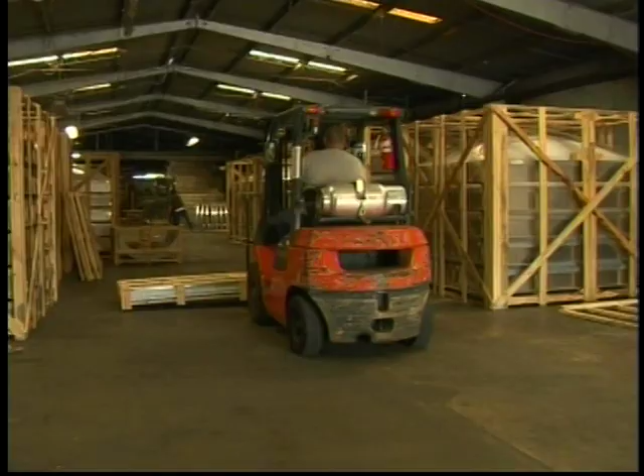OSHA estimates that tens of thousands of employees are injured or killed due to forklift accidents. To reduce the number of powered industrial truck accidents, OSHA revised and updated its regulation 29 CFR 1910.178. OSHA defines powered industrial trucks as any specialized industrial truck powered by electric motors or internal combustion engines.

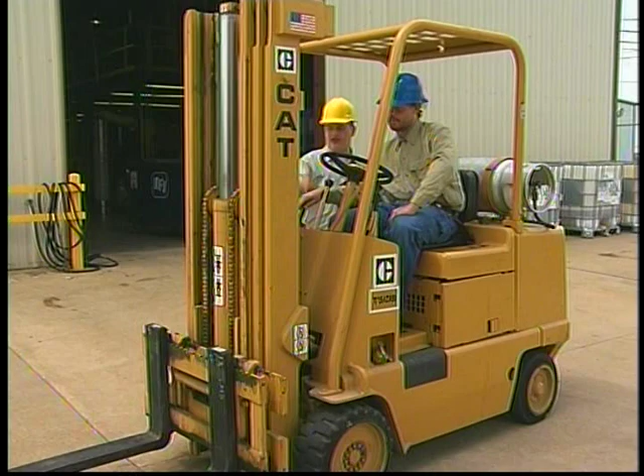This revised OSHA regulation requires initial forklift operator training before any employee can be allowed to operate such equipment. In addition, an employee must go through retraining in case of involvement in an accident or a near miss, if the operator is observed driving in an unsafe manner, the operating conditions or the equipment changes, and every 3 years. In addition to your classroom training on powered industrial trucks, hands-on driving training and a driving evaluation should follow.

The OSHA regulations are to be made available to all employees. Contact your training instructor or your supervisor to review copies of them.

There are many different types and styles of forklift. It is important that you understand the trucks your employer utilizes. Familiarize yourself with and reference the operator's manual that comes with the truck you will be using. Powered industrial trucks are divided into 7 classes based on their basic functions and characteristics.

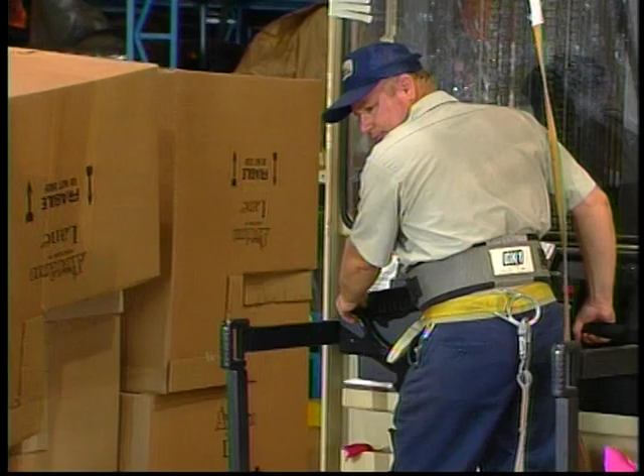Class 1, electric counterbalanced trucks. It has no exhaust and is often used indoors. Class 2, narrow aisle lift trucks and order pickers. If the operator is raised, they must use fall protection. Class 3, electric-powered hand trucks or pallet jacks. This only includes powered pallet jacks, including both the walk-behind jack and the ridden jack.

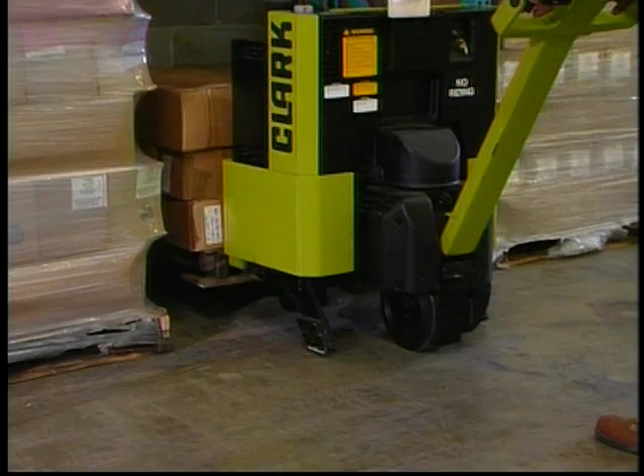Class 4, solid rubber-tired, combustion-fueled counterbalanced forklifts. These are only to be used on smooth surfaces, usually asphalt or concrete. Class 5, pneumatic-tired combustion-fueled counterbalanced forklifts. These can be used on unpaved surfaces, but not rough terrain.

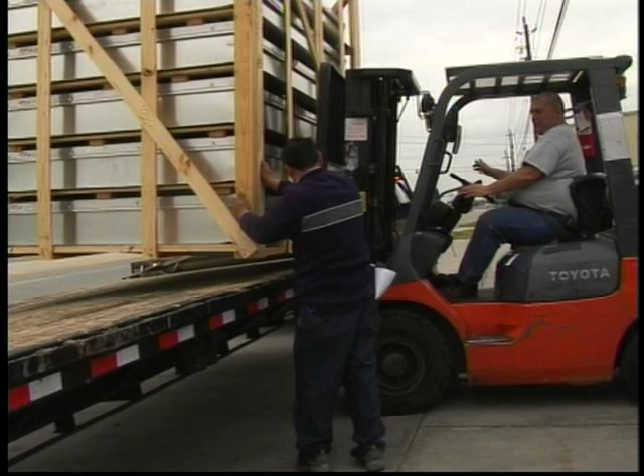Class 6, tow vehicles, such as the ones used at airports to tow planes and luggage carts. These do not lift loads. Class 7, counterbalanced rough terrain forklifts. These are commonly used on construction sites.

These 7 classes of powered industrial trucks were established based on their different handling and safety characteristics. It is important that you understand the specific type of vehicle you will be operating. You will only be able to operate the classification of truck that you've been trained on.

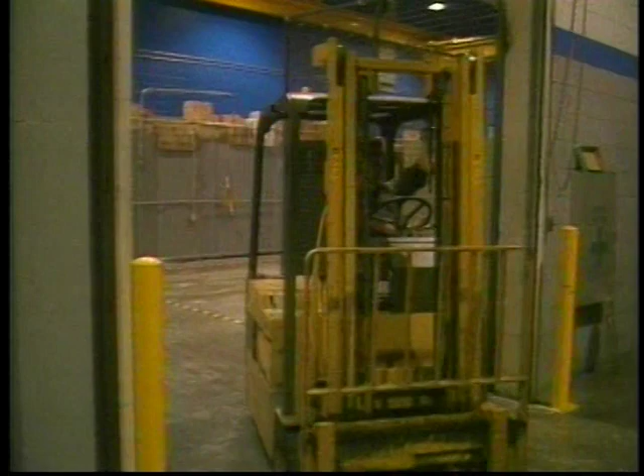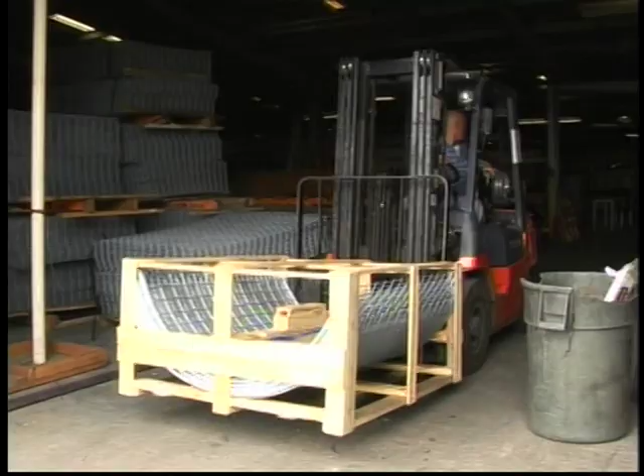All trucks have hazardous location designations. These designations inform operators if the truck may be used in various flammable, combustible, or hazardous areas. These areas should be properly marked, and any vehicle not meeting the proper safety qualifications should not be operated in these areas. Consult the OSHA Standard 1910.178, Table N1 for more information concerning designated areas.

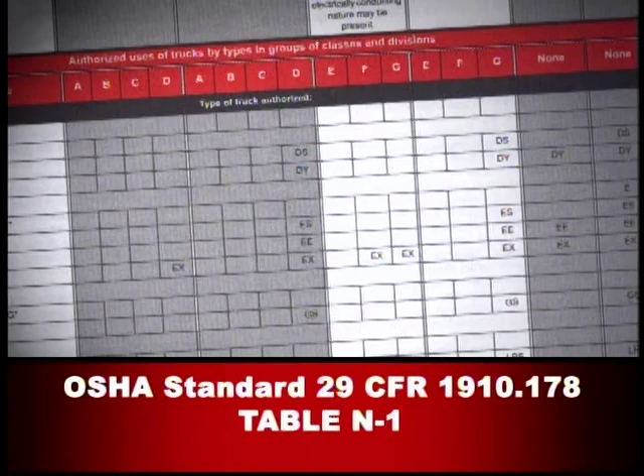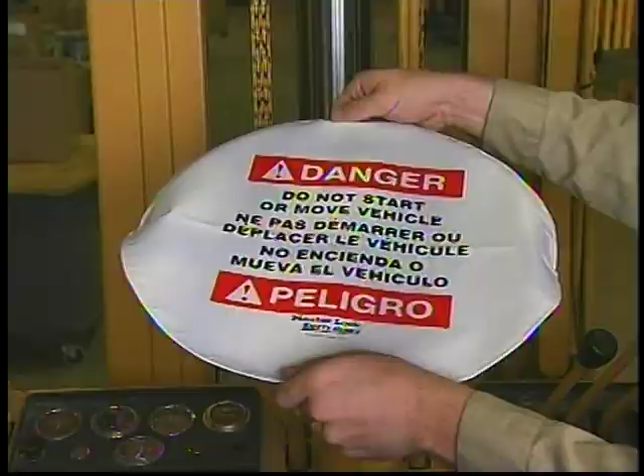Before the start of each shift, equipment inspection should be done. If anything is found to be defective, the vehicle should be taken out of service. You should also notify your supervisor of the problem.

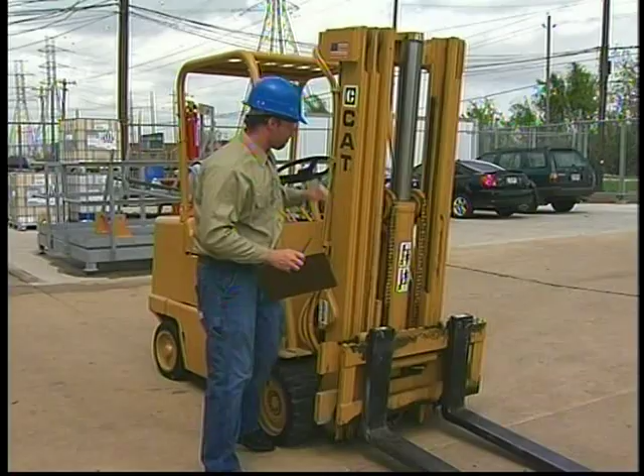To assist with your inspection of the equipment, an inspection checklist form should be used and is usually provided by your employer. These checklists may also be obtained in the operator's manual or from the equipment manufacturer. A sample checklist has also been provided with this training program.

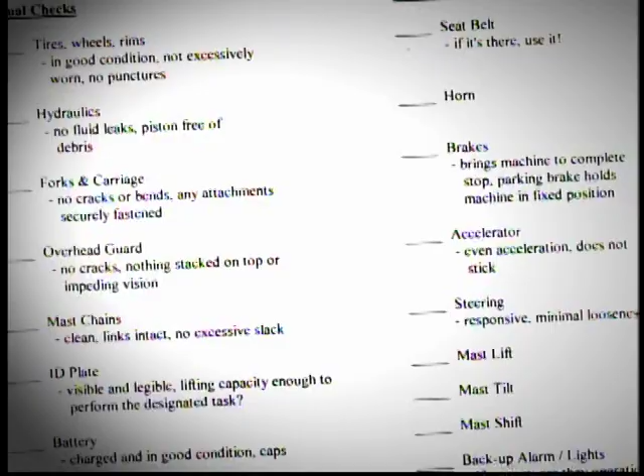The inspection checklist includes all safety items that need to be in working order. They include lights, horn, brakes, backup alarms, and seat belts. Other items to include in your inspection checklist are any moving parts, load supporting parts such as the mast, chains, and carriage, fluid levels, tires, steering, overhead guard, backrest, and any other items recommended by the manufacturer of the equipment.

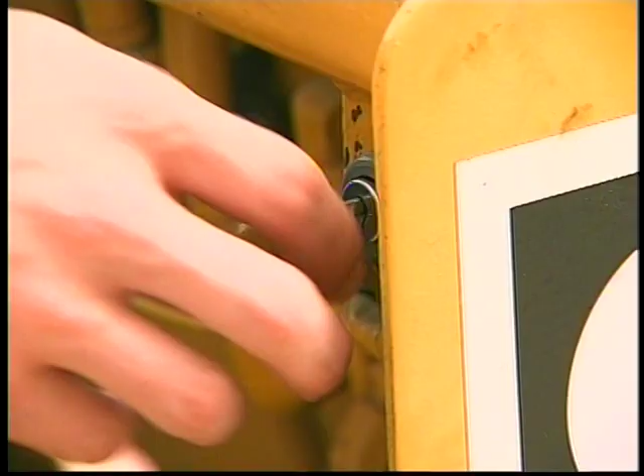When conducting your equipment inspection, the first items to check are those that can be done without the engine running. If all these items check out properly, then move on to the items to be checked with the engine running. Put the forklift through its normal maneuvers and check all its functions. Be especially cautious not to place your hands in areas of moving parts or between the uprights of the mast.

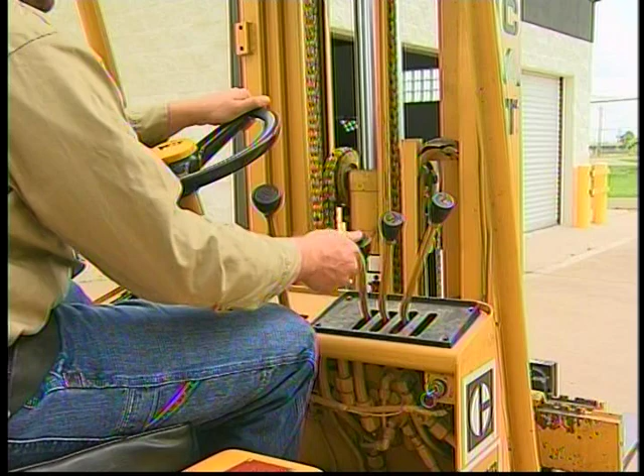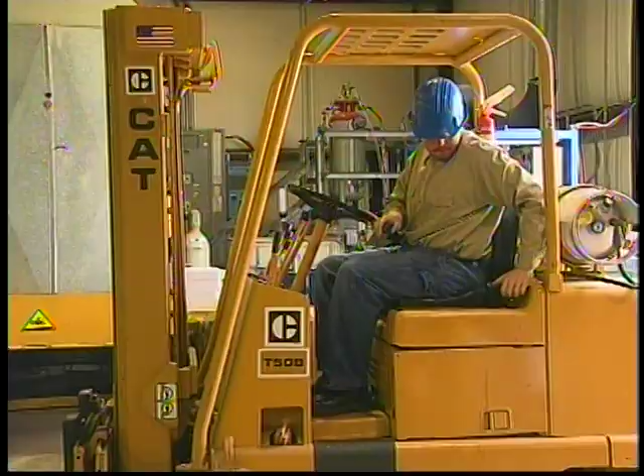Seat belts must be worn on all powered industrial trucks. If your forklift is not equipped with one, contact the manufacturer to obtain one.

While operating any powered industrial truck, it is important to keep all body parts inside the operator's area at all times. You must operate the vehicle in designated and safe areas only.

Make sure that the driving surface is clean and free of debris or spills. You need to pay close attention and be alert of any obstructions in the aisles you are operating on or of low-hanging items that you may damage. You also need to be observant for lights, sprinkler heads, pipes, or other overhead items.

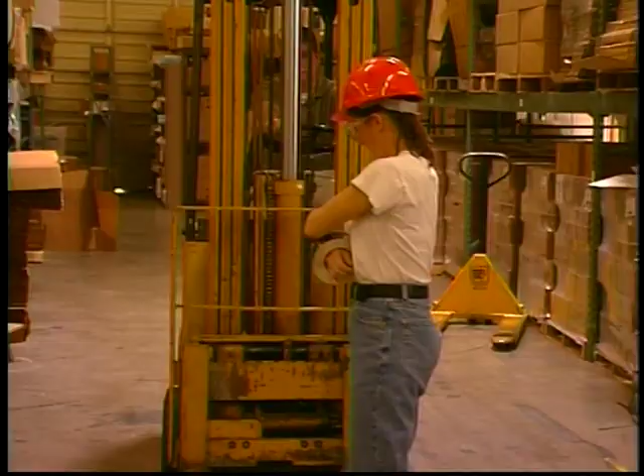Always maintain a safe speed. Forklifts should never be driven faster than would allow for a safe stopping distance. The maximum safe speed should be equivalent to a fast-paced walk. You should also gauge a safe operating speed based on driving conditions, pedestrians, and loads.

When following behind another forklift, maintain a distance of 3 truck lengths. When coming to an intersection or a doorway, you should always slow down and alert others of your approach by sounding your horn. Most powered industrial trucks are designed to be operated by one-person drivers.

Do not give rides to others. Do not allow any person to stand or pass underneath a raised load. Do not drive up to anyone standing in front of a fixed object. Always be alert of pedestrians near you and give them the right of way. Be sure to always look in all directions before you begin to operate your vehicle.

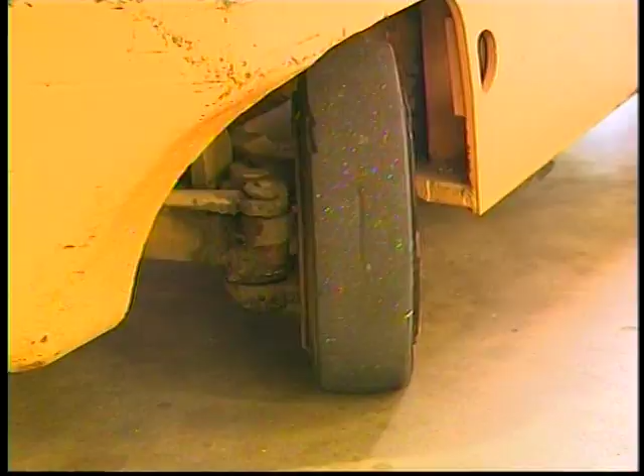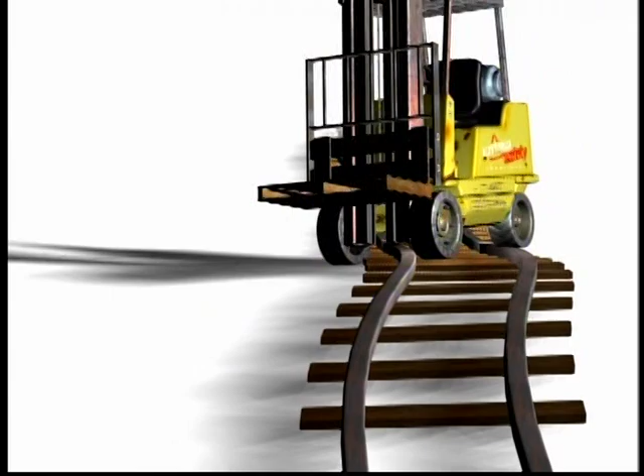Some forklifts have rear wheel steering that is different in operating than front wheel steering. Trucks tend to swing wide, and you must compensate for this. When crossing curbs or railroad tracks, do so at an angle. This helps keep at least 2 wheels in contact with the ground to prevent tipping.

Each forklift and attachment will have a permanent nameplate that states its rated capacity. These nameplates should be easily readable, and the rated capacity should never be exceeded.

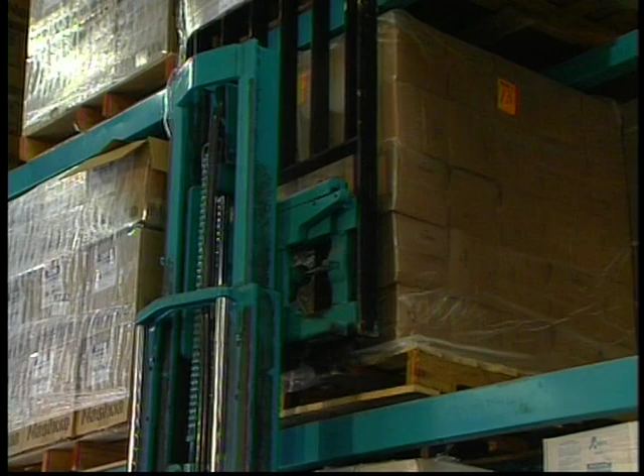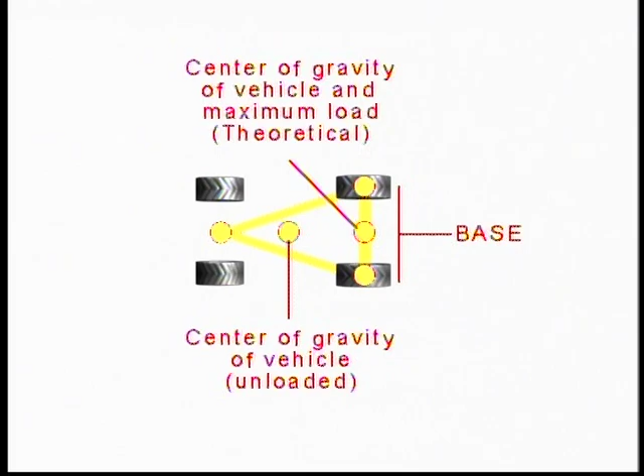A forklift's rated capacity is based on the fulcrum principle. Like a seesaw, the front wheels are the base of the fulcrum. If the load is too heavy or too far from the fulcrum, the forklift will tip forward.

The stability of each forklift is determined by ever-changing factors based on the stability triangle of the forklift. The front axle acts as the base of the triangle and supports the weight of the load. The sides of the stability triangle meet at the point where the forklift steers, either at a single wheel or in the middle of the steering axle on the 4-wheeled models.

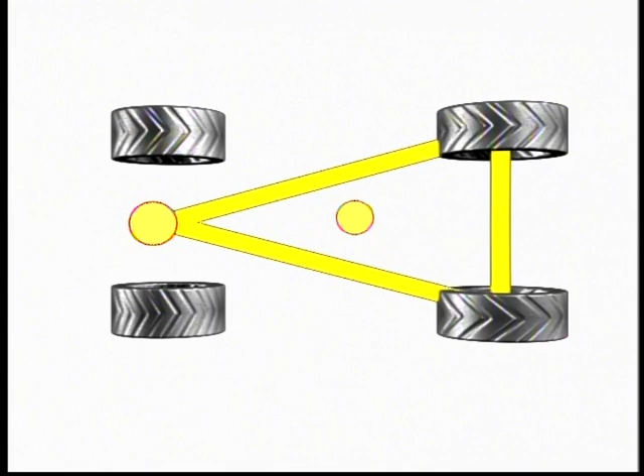The center of gravity for the forklift is changed by the load and by momentum. The forklift will tip over if either of these factors force the center of gravity outside the stability triangle.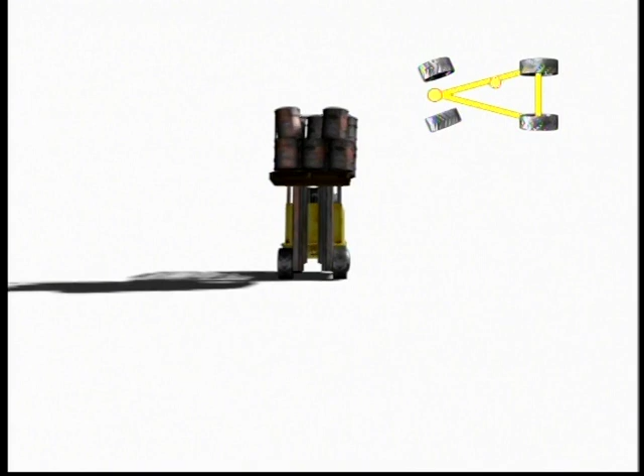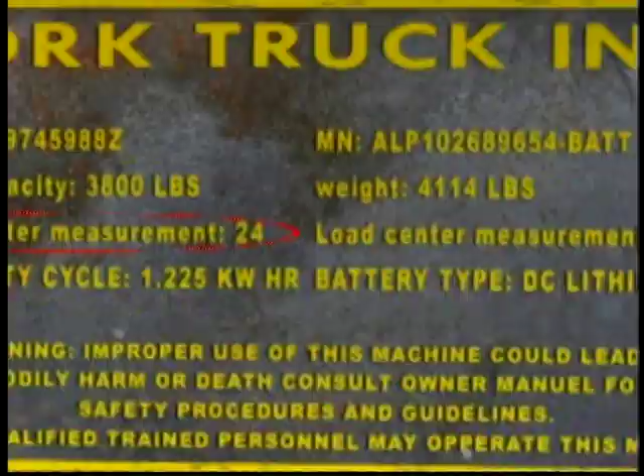Each load has its own load center. This is the center of its weight mass. This distance greatly affects the load capacity of forklifts. The nameplate will state the load center measurement on which the capacity is based. In most cases, this is 24 inches, meaning the load center should be no further than 24 inches away from the mast of the forklift. If the load center is further away, then the load capacity will diminish.

Tilting the mast forward also changes the stability triangle. The mast should never be tilted forward when raised unless it is over a rack or other supporting object.

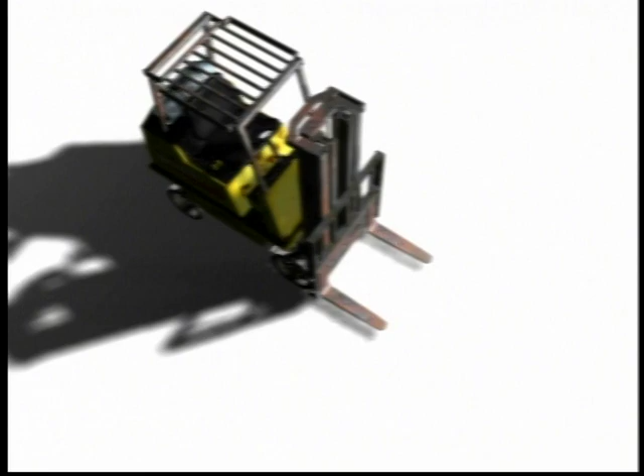A forklift can also tip over without a load. When a forklift is in motion without a load, the center of gravity is near the rear of the vehicle and very close to the side of the stability triangle. At this point, any quick turn or even an unstable driving surface could cause the forklift to tip over.

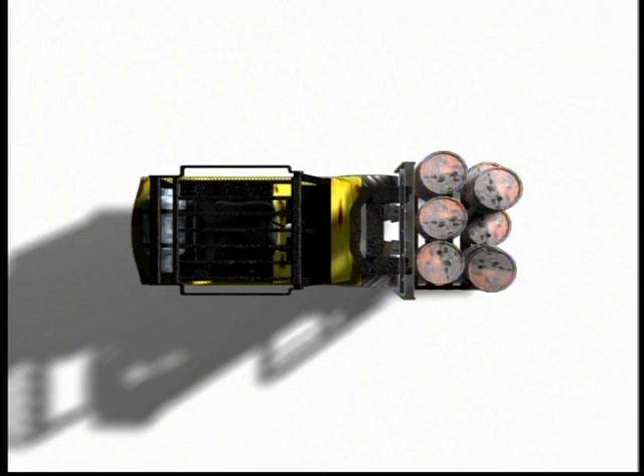Another aspect of the stability triangle is the vertical stability, or the line of action. This is a vertical line that runs through the forklift's center of gravity. If the line of action shifts outside the stability triangle, the forklift will tip over.

Additional factors in keeping the line of action within the stability triangle include the placement of the load on the forks, how high the load is raised, the angle of the floor underneath the forklift, and momentum.

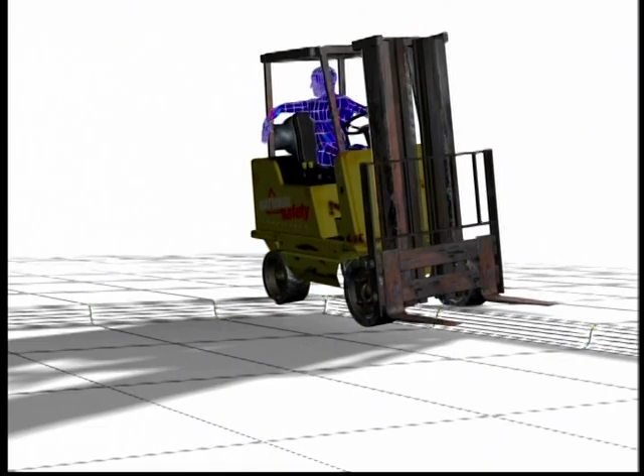In the event of a forklift tipping, do not jump free. You could be crushed beneath the forklift or the load. Brace yourself, hold onto the steering wheel and pull yourself tight up to it. Keep all parts of your body inside the operator's area.

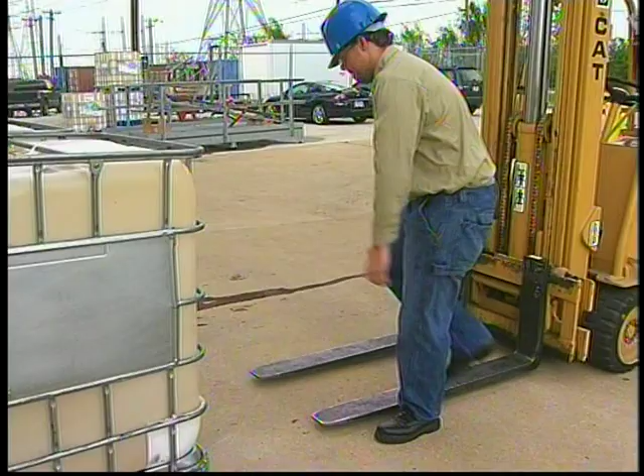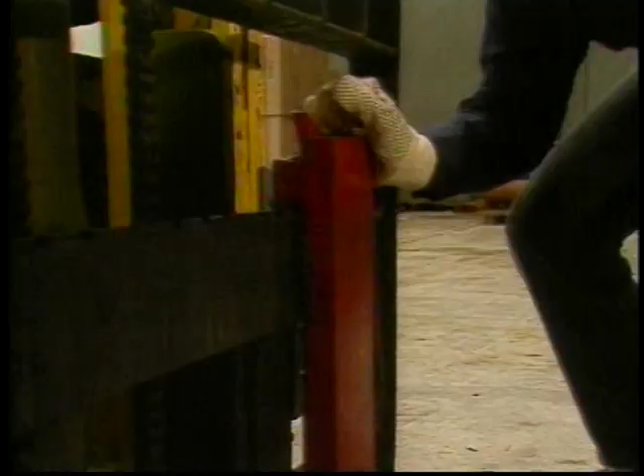Before picking up a load, it should be inspected to make sure it is properly secured and won't shift during travel. You also need to make sure the load is within the weight limit for your forklift. When approaching a load, stop about 12 inches before reaching the load. Make sure your forks are adjusted as wide as possible for the load. Square up on its center and level the forks at the height appropriate for lifting the load. Drive slowly forward until the load rests against the mast.

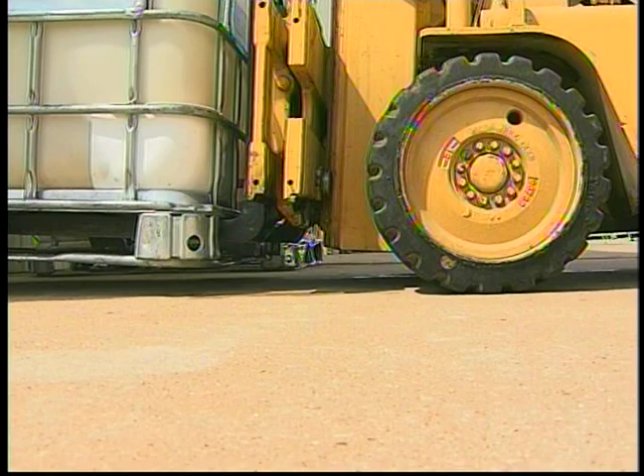Lift the load high enough to clear the floor or rack, and then tilt the mast back slightly to a traveling position. If necessary, lower the load to a few inches above the ground so as to clear all objects while traveling. If the load obstructs your view, drive in reverse or use a spotter to make sure your pathway is clear and safe.

Before using a ramp, make sure it can support the load. Use only approved portable ramps or dock plates. Be sure they are securely in place before using them. When transporting a load on a slope, always keep the forks pointed uphill. When coming down a slope, always do so in reverse so as not to risk losing your load.

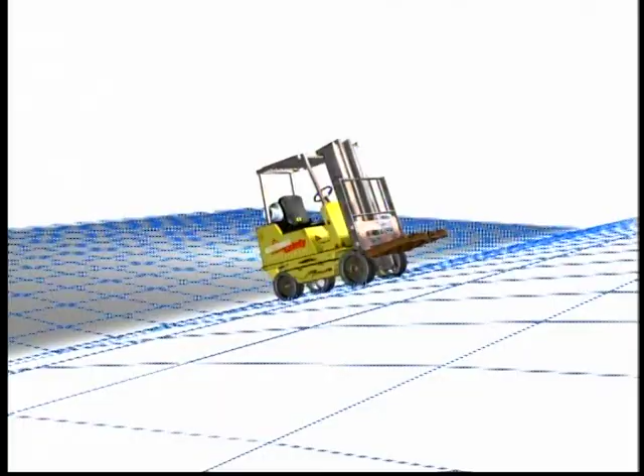Never drive across a slope at an angle with or without a load. This can cause the forklift to tip over. Some powered industrial trucks may not be driven on a slope. Please consult the operator's manual for more information.

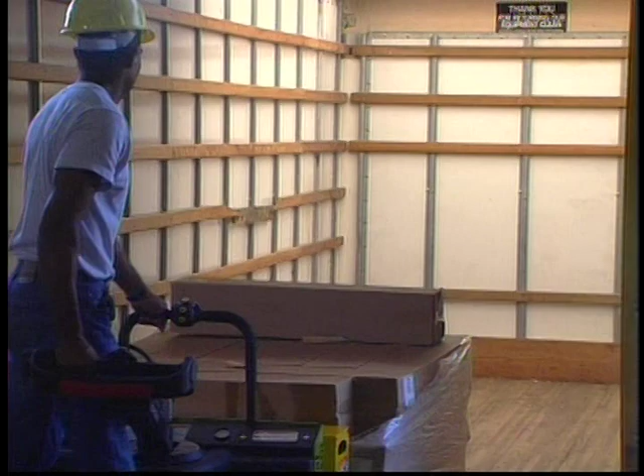Before driving onto a rail car, truck, or trailer, set the vehicle's brakes. Next, block its wheels. Make sure trailers are supported under their kingpin with a fixed jack or the tractor truck. Finally, check the floor surface to make sure it will support the weight of the truck and your load.

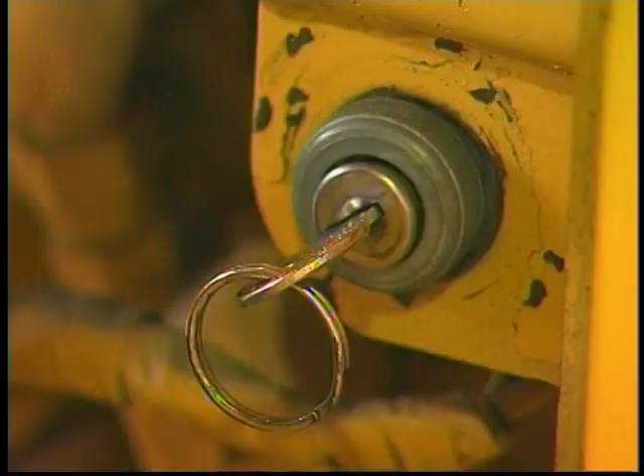If you are going to be away from the forklift at a distance of 25 feet, the vehicle needs to be shut off. Place the transmission in neutral or park, apply the parking brake, and lower the forks all the way to the ground. Be sure that you are not blocking any exit paths or firefighting equipment. If working in a rail yard, do not park closer than 8 feet from the railroad tracks. If parked on a slope, make sure to place blocks behind the wheels.

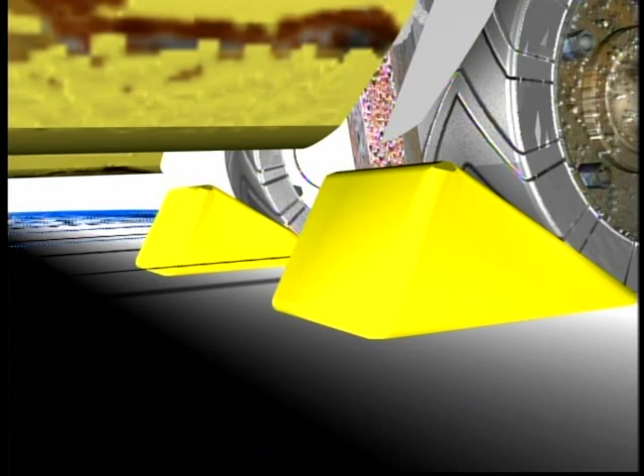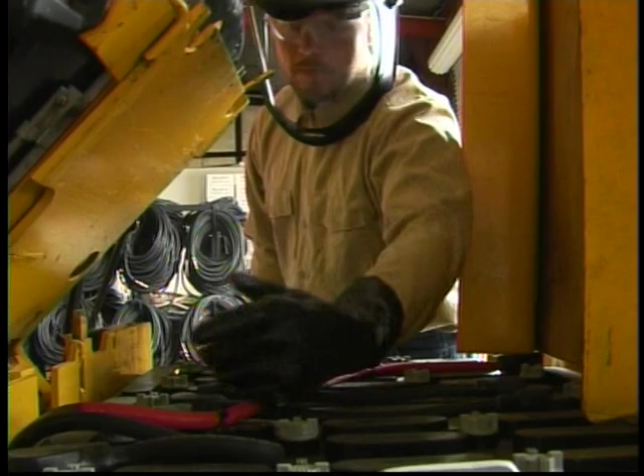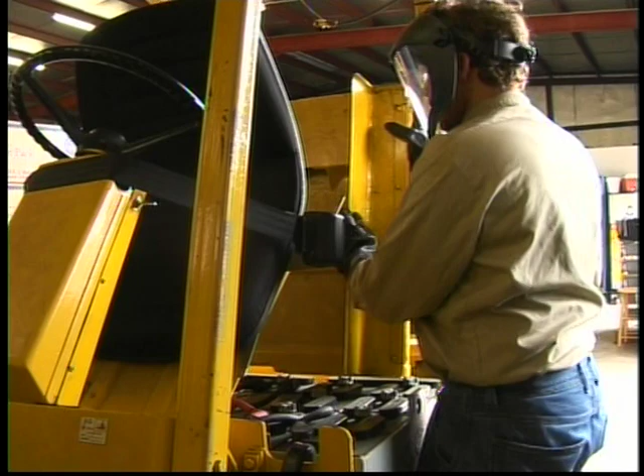Before operating an electric-powered truck, make sure the battery connections are on tight. Next, check the battery's electrolyte level. Be sure to use personal protective equipment such as eye protection, face shield, and gloves. The battery should be removed from the vehicle, or the battery compartment needs to remain open while charging.

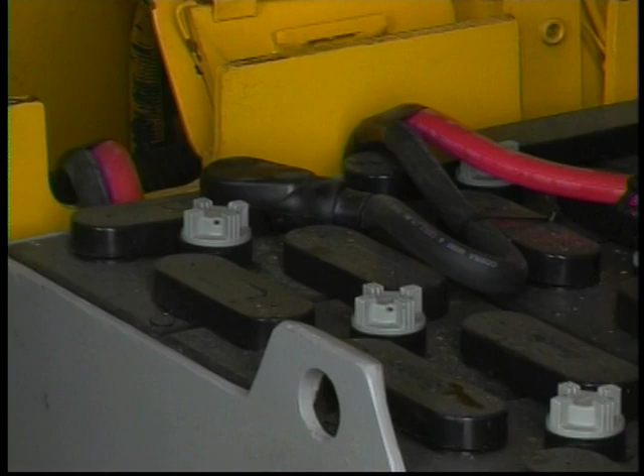When charging batteries, be sure to do so in designated no smoking areas. Charging batteries produces flammable hydrogen gas, so use care to avoid causing sparks or flames. You need to leave the charger off until you have connected it to the battery, and again have it off when you disconnect it from the battery. When replacing a battery, make sure to secure it in place. A loose battery during operation can overturn a vehicle.

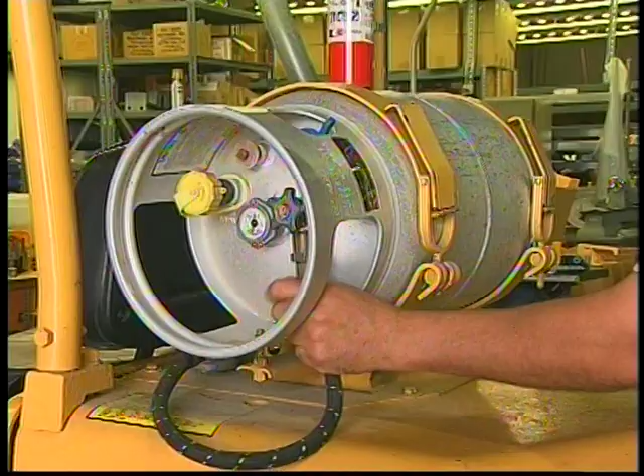The refueling of vehicles that run on propane, gasoline, or diesel fuels should only be done in designated no smoking areas, and the engines must be turned off. For propane-fueled trucks, remove the propane tanks prior to refilling. After refilling, make sure the tank locating pin is properly aligned before securing the tank to the truck.

All combustion-fueled trucks should have an annual emissions test to monitor their emission levels. This is especially important for trucks operated indoors. Be sure the work area you are in is well ventilated to prohibit the buildup of carbon monoxide.

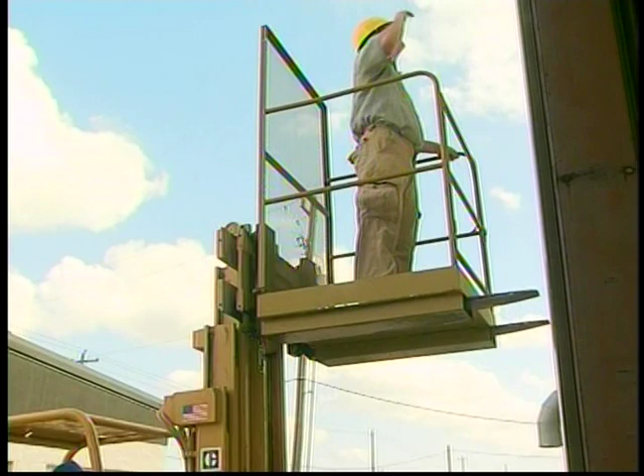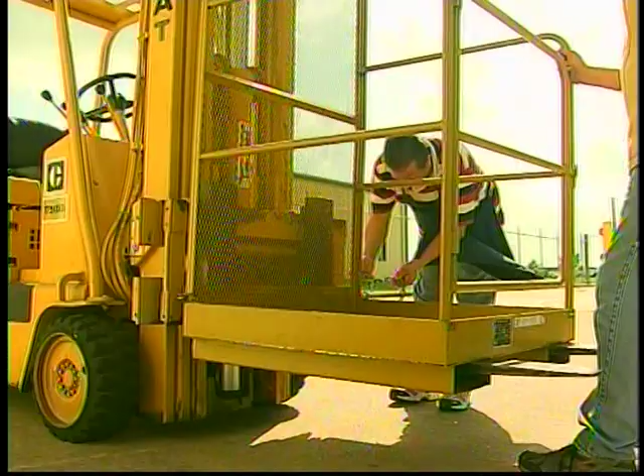Approved employee platforms may be used to elevate personnel. These platforms are the only method for lifting anyone standing or sitting on the forks. Other attachments may be used if they are approved and have a nameplate stating their capacity. It is important to remember that attachments will change the load center and diminish the capacity of the forklift. Always determine the correct capacity of your equipment before lifting any load.

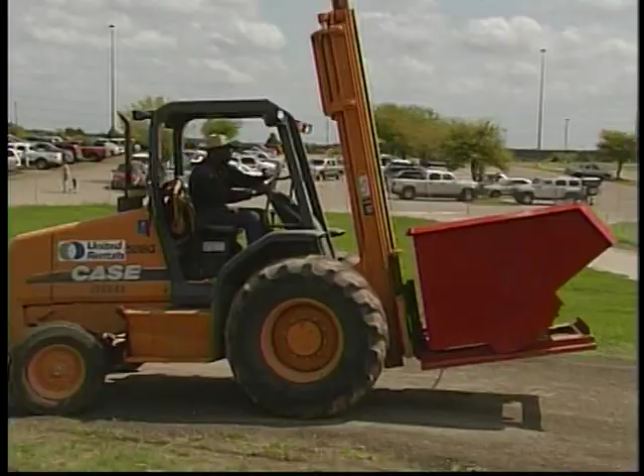Operating forklifts and any powered industrial truck is an important job. Use the knowledge and skills presented in this video to operate forklifts in a professional and safe manner.